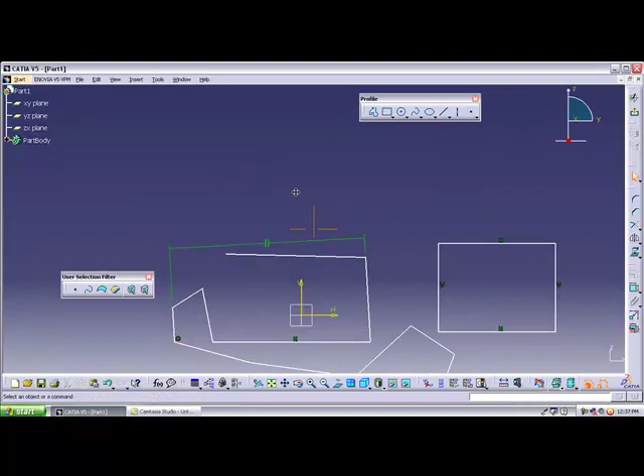Okay, so if you hold the middle button and move the screen, it is called a pan. Means by holding the middle button of the mouse and moving the cursor, the screen moves; it is called a pan.

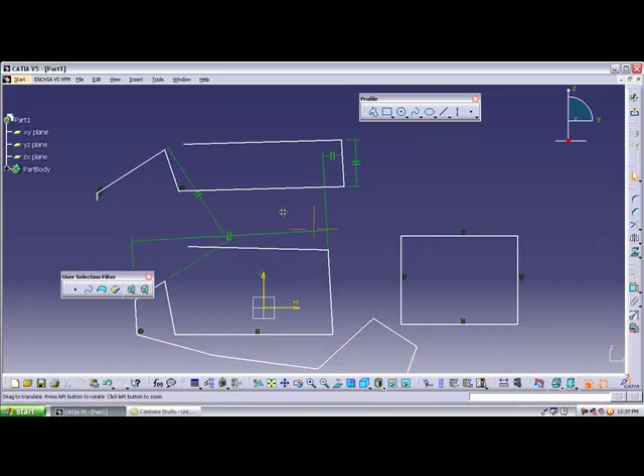Okay, after that, just like in AutoCAD, there is an option of ortho. By the ortho operation we can draw a line straight in the direction of 0, 90, 180, 270 degrees. Here also we have that option. Let's see, here the line is in a white color. If you go in the 0 direction, it's converted into blue. From the top, it is 90 degrees, and it also turns blue. Going to the left side, blue means it's 180 degrees. Going to the bottom, it is 270 degrees and the line is straight.

So how can we recognize whether the line is straight or not? By seeing the color. If the line is converted into blue, it indicates that it is a straight line. Right now the line is straight in the 0 direction, in the 90 direction, in the 180 direction, as well as 270 degrees. Like this we can draw a straight line by the color. To draw a straight line, we should show the direction, and if the color turns blue, the line is straight.

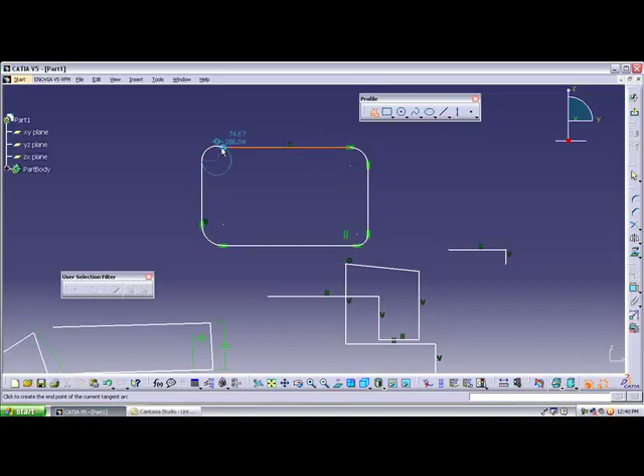Okay, so I'm showing one more point here, and it's getting a straight line. After that I want a curve, so I am dragging this one like this. Okay, so from the profile toolbar we can draw a straight line as well as an arc. This is the profile tool.

In CATIA there is no erase option. So to delete all the things, select all the items and use the delete option. Then we can delete all the things. So with the profile toolbar we can draw a straight line, and it's a continuous line. To end the line we should double click.

Suppose when we are drawing a profile, if you want a curve, then by holding the same selection button you should drag the mouse, then you will get a smooth curve. This is the profile. Okay? So the next one is the rectangle.

A rectangle is nothing but a shape which has 4 sides. Except the profile tool, the rest of the tools we also call predefined profiles. Profile means it can be any shape; with the profile toolbar we can make any type of shape. What are the shapes we can make? Rectangle, hexagon, polygon, septagon, anything. Those shapes are already predefined, so we call them predefined profiles.

In the predefined profiles, the first tool is the rectangle. By selecting the rectangle we show 2 points, and by showing the 2 points we get a rectangle. Okay? Suppose I want to draw multiple rectangles, then you should double click on the rectangle. If you double click on any tool, then we can use the tool multiple times.

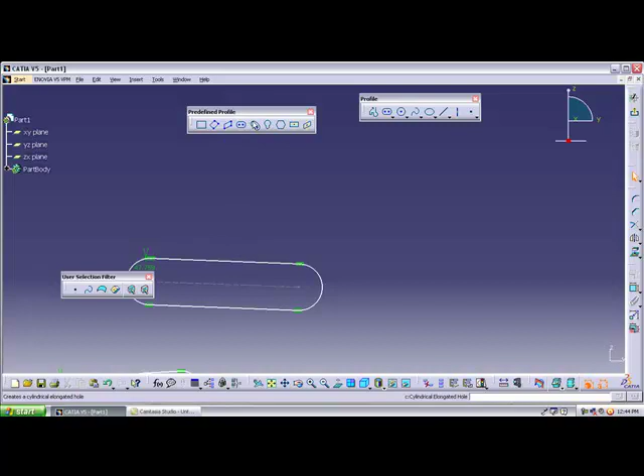And the next one is a circular elongated hole, cylindrical elongated hole. Right now the elongated hole is straight here, but here we will get it circularly. So first of all, you should select the center point of the circle and you will get a circular shape. In this part, how much of the circle do you require? Suppose I require up to here only. After that, if you complete the axis, then you will get it as elongated.

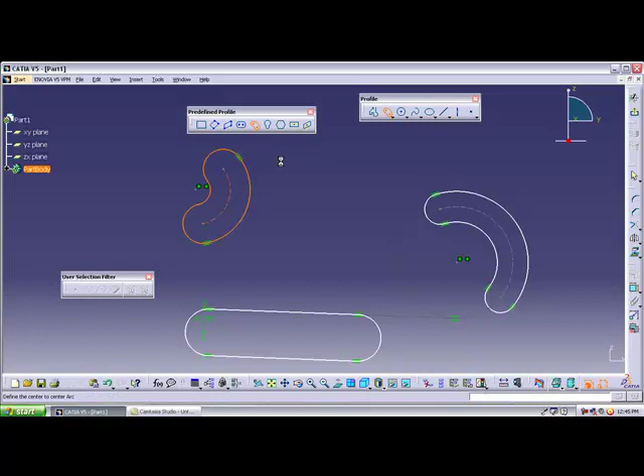So if you want to use an option multiple times, you should double click on that option. So we can use it multiple times. Okay, center point, start, end, and the boundary of the cylindrical elongated hole. Suppose I need one more time. Why? Because I used multiple options. So center point, start point, end point, and the boundary of the diagram. Okay, like this we can make the cylindrical elongated hole.

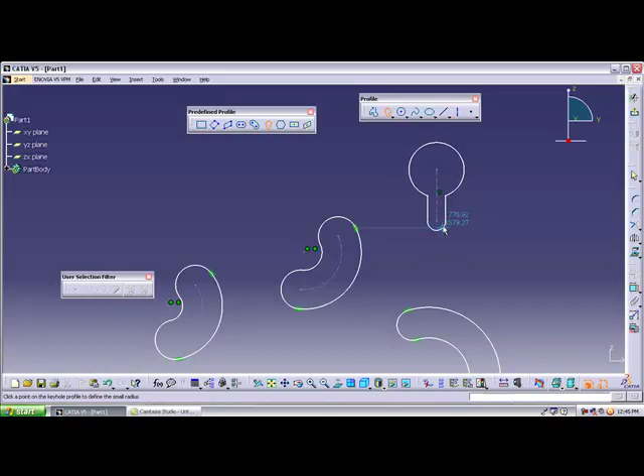Next one is the keyhole. Keyhole is nothing but you are showing the axis. In the elongated hole, the total object along the straight axis is uniformly the same. But here you will get a different type. So this is the shape, and what is the top shape? Okay. So what is the keyhole? First of all, the axis. After that, you give the shape of the downside and the shape of the upside. This is called an elongated keyhole.

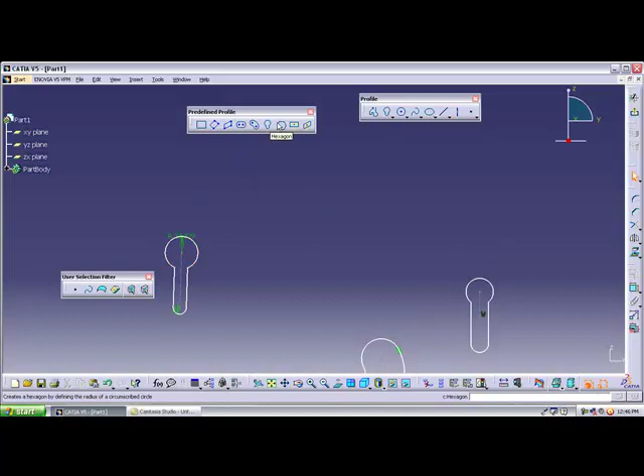And next one is the hexagon. What is the hexagon? It is an object closed by 6 sides. Okay, this is called a hexagon. So by selecting this hexagon, show the center point of the hexagon and drag out, then you will get a hexagon.

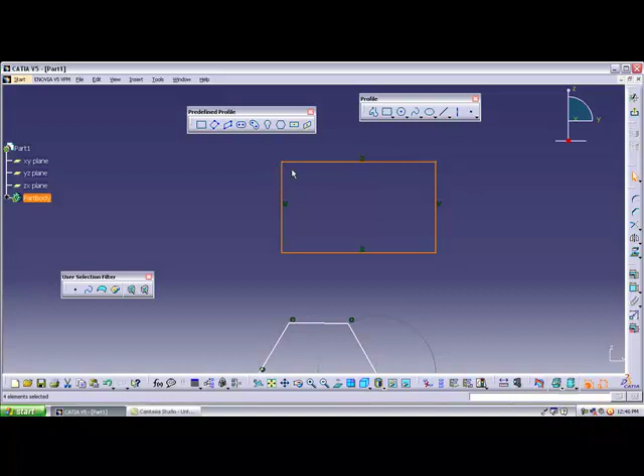And next one is the centered rectangle. Let me see what is the difference between the first rectangle and the centered rectangle. In the first rectangle, we are showing the corner points of the rectangle, first corner and second corner. The centered rectangle means we are drawing the rectangle from the center of the rectangle. Right now I am showing the center of the rectangle. See, the rectangle starts from the center point, so it is called a centered rectangle. We show the center point, then we get the rectangle from the center. So it is called a centered rectangle.

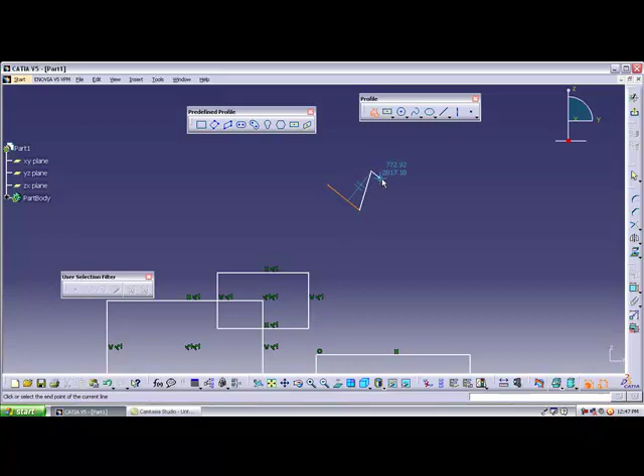And the next tool is called a centered parallelogram. Just like the centered rectangle here. To draw a centered parallelogram, we compulsorily need references. Why? Because in a rectangle the two sides are compulsorily at 90 degrees, but in a parallelogram the sides are different. So select the centered parallelogram and select any two sides. Then what will you get? You will get a centered parallelogram.

How is it possible? These two lines are parallel to this line, as well as these two lines are parallel to this line. And what is the intersection point? This is the intersection point of these two lines. So from the center intersection point, the parallelogram starts. How to use the centered parallelogram? Select centered parallelogram and select the two lines, from the center point of the two lines. Then you will get a centered parallelogram.

Okay, now on the screen I have drawn many objects, but right now I am only viewing here. I want to see all objects on the screen. At the bottom, you will have the option called fit all in.

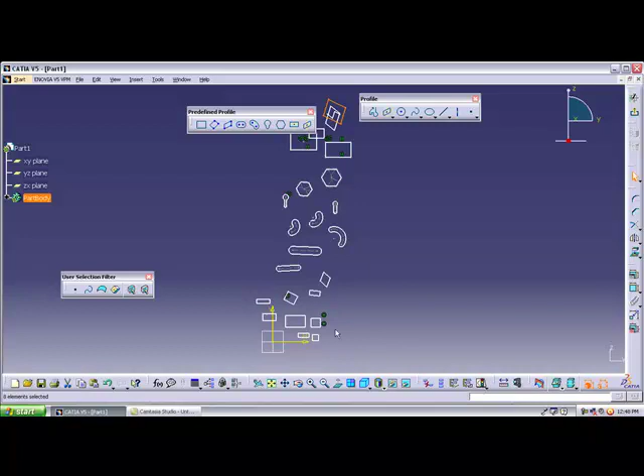By holding the fit all in option, we are fitting all the objects into the screen window. This is called fit all in - placing all objects into the screen window. Right now I want to delete all objects. What I should do is drag the mouse, select all the things, and use the delete option.

Right now the screen is very big, so I want to place the coordinate at the center. Then use fit all in - what happens? The coordinate system comes into the center. So using fit all in, we can fit all objects into the screen, and if there are no objects, the coordinate system gets placed at the center of the object. This is a predefined profile.

The next one is circles. We have different types of circles. This is the first type of circle. What is the meaning of circle? What are the components to draw a circle? That is the center point and the radius. By showing the center point, and next the radius, what do we get? We get the circle - just by showing the center point and the radius.

To get multiple circles, what should you do? We should make a double click on the tool. By double clicking on any tool, we can use that option multiple times. This is called circle.

Next is the 3-point circle. The first circle is formed by showing the center point and the end point. Here the circle is formed, but this circle is formed by joining 3 points - first point, second point, and third point. Let me select the 3-point circle and show the 3 points - by showing 3 points, the circle is formed.

Suppose I show the 3 points - this as the first point, second point, and third point. The circle is formed between these 3 points. Like this we can make a 3-point circle. So a 3-point circle is nothing but showing 3 points, and the circle is formed through those 3 points.

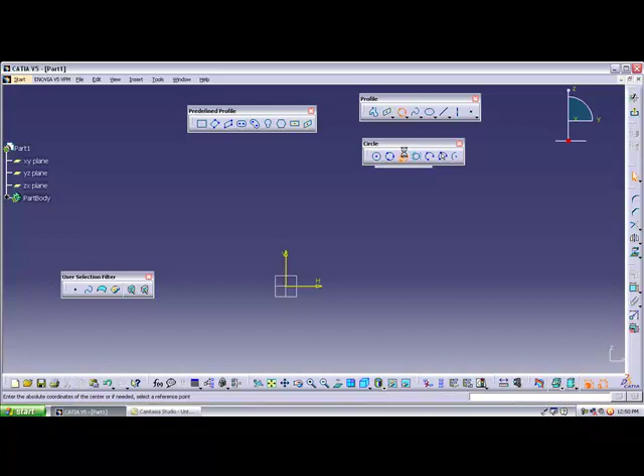Next is the option of coordinate circle. These circles we can draw anywhere, but this circle is drawn using coordinates. Let us see - select a circle. It asks for the x and y axis, but in CATIA it is in the form of horizontal axis and vertical axis.

It's asking what is the distance from horizontal and vertical for the circle's center point. Suppose from horizontal the distance should be 50, and vertical the value should be 75 - that is the center point of the circle, shown at a certain distance: horizontally 50 and vertically 75. And what is the radius of the circle? Suppose the radius is 50, let us assume. Then you will get a circle.

Suppose if I require a circle in the second quadrant, what parameters should we give? We should give horizontal as minus 50, and vertical can be anything, then the circle can be formed in the second quadrant.

Suppose if I require the circle in the third quadrant, we should give the parameters as negative values: negative 25 and negative 25, with the circle radius as 20. See, right now the circle is formed in the third quadrant.

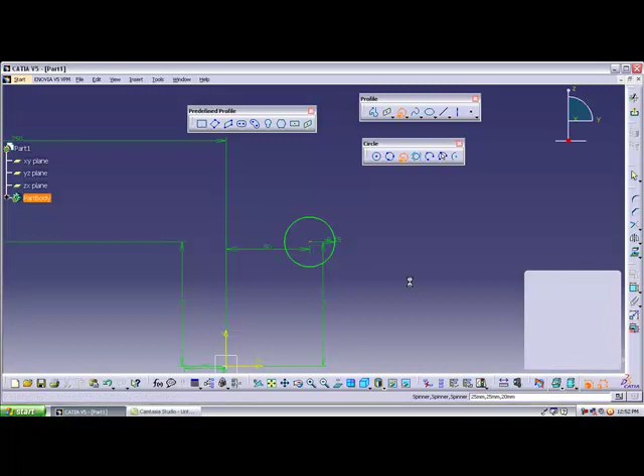Suppose I want to change the origin point to this point. So if you want to change the origin point, first you should choose the origin point. After that, make the coordinate system and give the parameters, then the dimensions are taken from what was shown in the previous point.

So from this point it is taken as the origin. If you want to change the origin, first select the origin point, then start the coordinate system. Then it will take this point as the origin, and from that origin only the circle will be formed. This is called a coordinate circle.

Now I want to delete. What you should do is select all the objects and use the delete option.

The next one is called the tangent tritangent circle, meaning a circle formed by touching three lines, or also circles. What is meant by touching, what is meant by tangent? Tangent means it should touch some components - the components may be a circle, a rectangle, or anything.

So tritangent circle means: suppose I show these 3 lines, then the circle is formed by touching all the lines. Similarly, I'm showing 3 circles - first circle, second circle, and third circle - and by touching these 3 circles, a circle is formed. It is called tritangent because there should be 3 tangents for the circle to form.

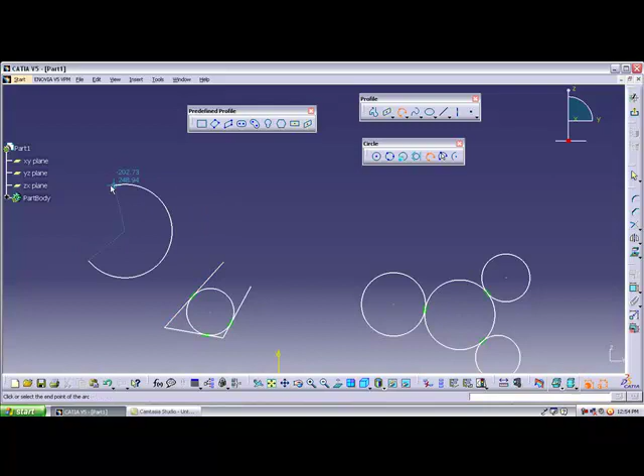The next option is the arc, called the 3-point arc. What is the meaning of arc? Arc is nothing but a part of a circle. The first one is the 3-point arc, meaning if you show 3 points, you will get an arc: first point, second point, and third point. We can also call these the starting point of the arc, the midpoint of the arc, and the end point of the arc. So what are the 3 points? Start, mid, end.

The next one is also a 3-point arc, but here it's a bit different. In the previous one, it was start, middle, end, but here we show start, end, and then the midpoint. So the difference between the first arc and second arc is clear: starting point, end point, after that we show the midpoint.

The next one is called the arc. What's the exact difference? As I said, arc is nothing but a part of the circle. So here, first when we choose this option, we show the center point of the arc, and after that you get a complete circle. Since arc is a part of a circle, we should then choose how much part of the circle we require. So this is the arc.

One more time: select this arc option and show the center point of the arc, so we will get a circle. Then choose how much part of this circle we require - that is the arc. It is formed from the circle. So this is the circle toolbar.

The next one is the spline. What is the meaning of spline? Now, what is the meaning of a line? A line is nothing but a straight line between 2 points - if I show the points, a straight line is formed between them. Similarly with spline - spline is nothing but a smooth curve formed between the 2 points.

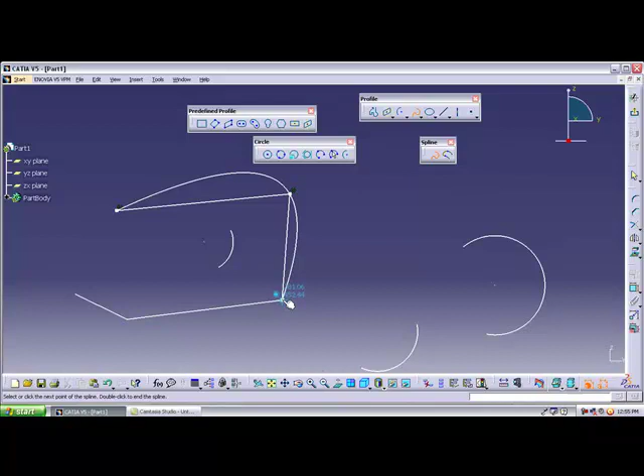See, right now I'm showing the same points which I showed for the line. So what are you getting here? You will get a smooth curve. For the profile also, I showed the same points.

For the spline also I am showing the same points. The difference is that if it is profile, it is forming a straight line, but in the spline it's forming a smooth curve. It's not important that we show the same points used in the profile. If you roughly show the points, you can form a smooth curve. So by showing the points, you are getting a smooth curve.

To end the spline, what we should do? We should make a double click. Then the spline will be ended.

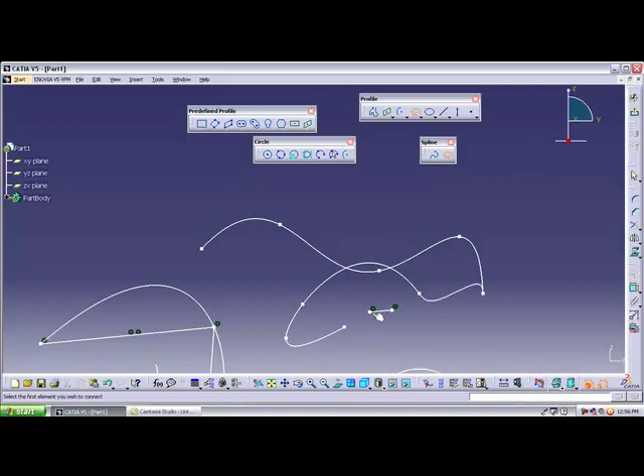So this is the spline, and in the spline toolbar you have one more option called connect. The connect tool is used to connect two splines. Suppose there are two splines, we can connect them using the connect option. By selecting the connect tool and selecting the two splines, we can connect them. So suppose I want to connect this spline and this spline. See, a spline is formed between the two splines. What we call this is the connect option.

The next option is the ellipse, or conic as we also call it. Now, what is the difference between circle and ellipse? In circle, we have only one radius, but in ellipse we have two radiuses or two diameters, called the major axis and the minor axis. If you give the radiuses, you get the major radius and the minor radius. That is the difference between circle and ellipse. In circle we have only one radius, in ellipse we have two dimensions, two diameters.

So by showing the center point of the ellipse, you will get the oval shape, which we call an ellipse. Let us see if you get the sides. Right now we are showing one as the major point and the other section as the minor axis. So this is the major, let us consider, and this is the minor. Whichever is the big portion is called the major axis, and whichever is small is called the minor axis.

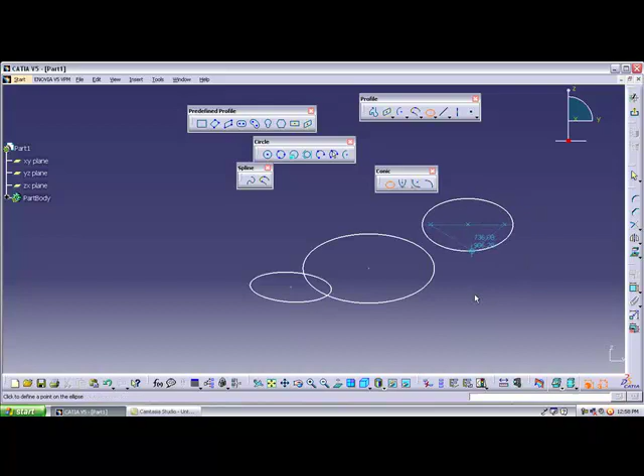So how we can draw the ellipse: show the center point and drag. It may be major or minor. Suppose I consider it minor, then it should be small, and the next portion we are drawing should be big, then it can be called the major axis.

In the conic, the next option is the parabola. How do we draw the parabola, and what is the meaning? Just as an arc is a part of a circle, a parabola is a part of an ellipse. So parabola and hyperbola along with conic are the three options in the conic toolbar only.

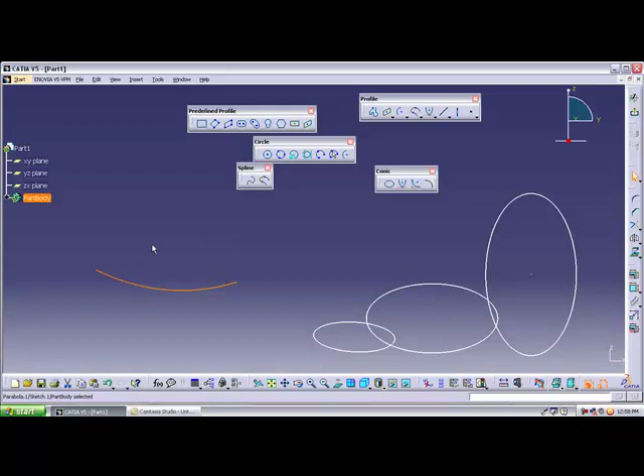So how can we form a parabola? Let me see. Select the parabola, we are showing the focus point, then the apex, then the start and end. Let me see, just like the name suggests, we can call it a part of an ellipse also. So to form a parabola: focus point, apex, start, end. Right now, see this point I've shown, from here to here is less distance, and from the right side it's a bigger distance, which means it's the part of an arc. So this is the parabola.

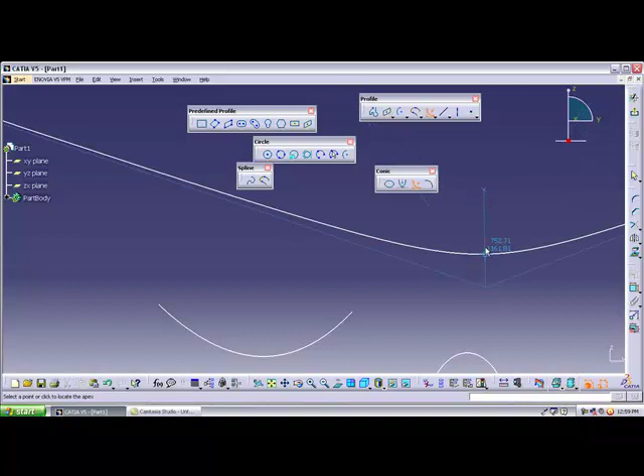The next one is the hyperbola. How do we form the hyperbola? Let us see. Here also the same terms used in the parabola apply, but the difference is somewhat different. Here also we show the same focus point, but here you get one more point called the center point. After the center point we should show the apex, after the apex we use the start point and end point.

One more time, the difference is that here you have one more option called center point. Select the hyperbola, select the focus point, after that show the apex point, after that start point, end point. One more time: select the hyperbola, select the focus point, after that show the center point of that hyperbola, after that apex, after that start and end.

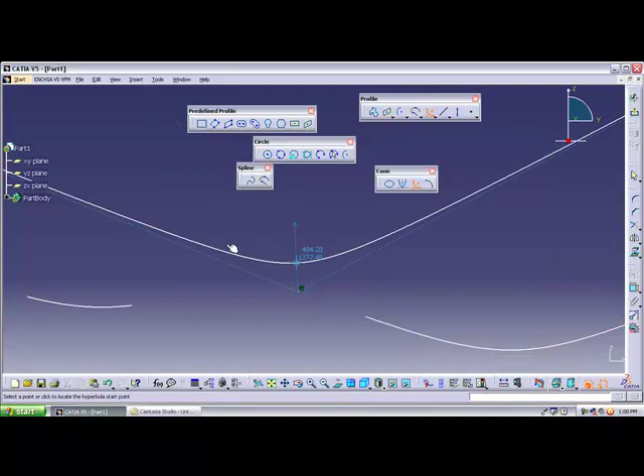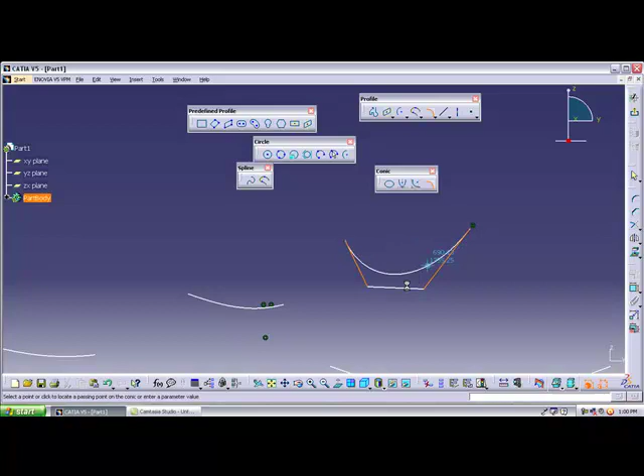Okay, this is the hyperbola, and the next option is called a conic. What does conic mean? The conic is just like forming a tritangent circle; like that, we can also form a tritangent arc. Select the conic option and select the two opposite lines, after that select the third line, then you can form the conic feature. One more time.

Okay, this is called a conic, meaning there should be two lines, after that we should show the third line, then you can form the conic feature. Okay, right now we completed the conic, and the next option we are dealing with is called lines. This is the lines toolbar.

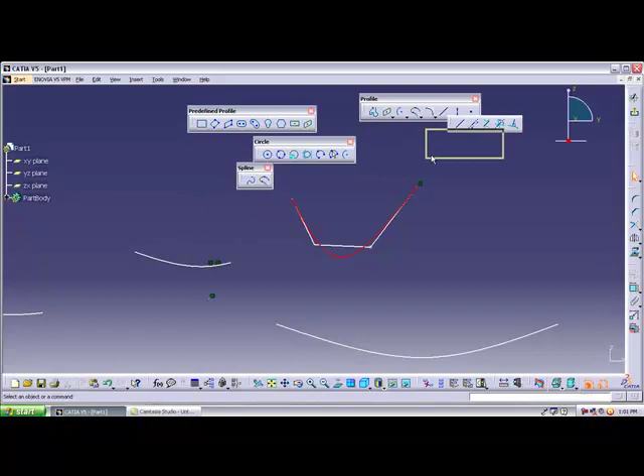Actually, in the profile we can draw a line, but there the line is continuous in the profile. Here we have the line option. This indicates it's just a small line between the 2 points, it's not a continuous line. By selecting the line we show the 2 points, and the line will be formed between the 2 points.

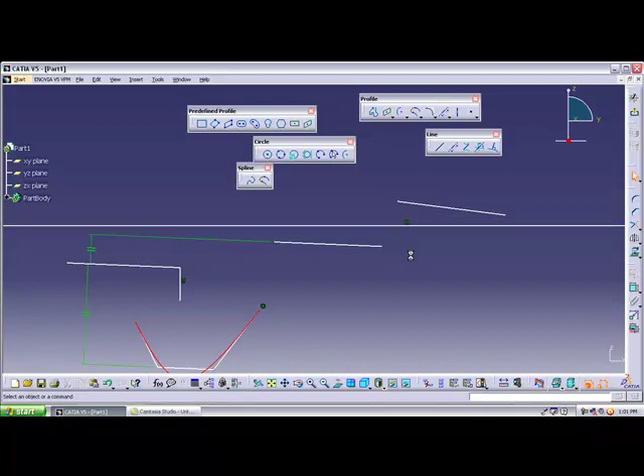Okay, and the next one is the infinity line. Infinity line means the line has no end. Let me see, suppose I use the fit all in option, then what will happen? See, all of these are fitted, but these two lines are in an infinity condition, so it is called the infinity line.

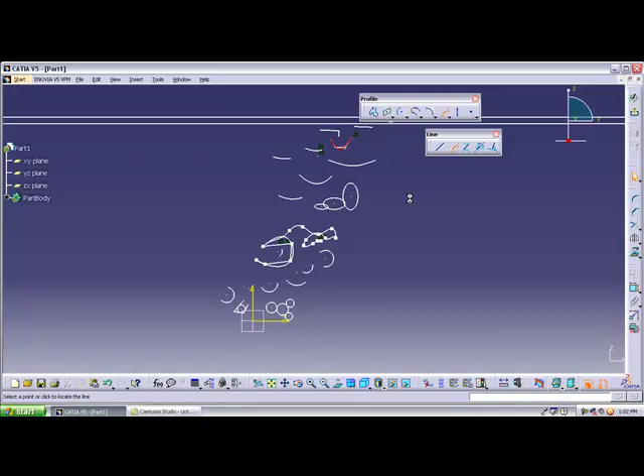So this is the infinity line, just select the infinity line. If I show 2 points, then you will get the infinity line. See, right now I am selecting the infinity line and showing the 2 points; by joining the 2 points we get the infinity line. Infinity line means it doesn't have an end, so it is called an infinity line.

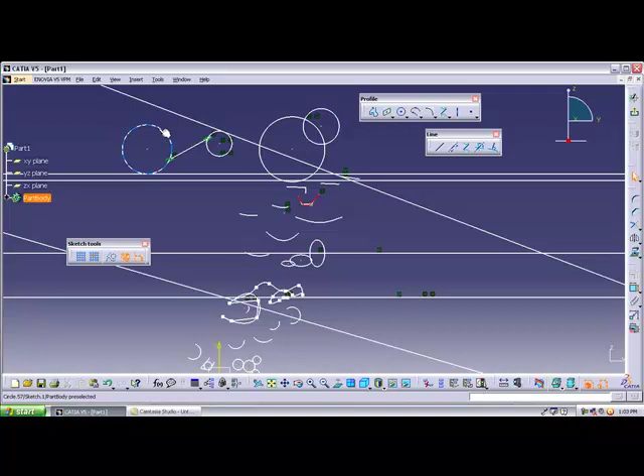Okay, and the next one is called the bitangent line. To draw this line, we compulsorily need two circles, then only we can form a bitangent line. So right now there are two circles. Only by touching these two circles is the bitangent line formed. Select the bitangent line and select the two circles. Between the two circles the line will be formed. It is called the bitangent line. This is bitangent. And the next option is the bisecting line.

What is the meaning of bisecting line? Suppose there are two lines here, like this. Right now I want to form a line between these two lines, exactly in the middle of these two lines. So select the bisecting line and select the two lines, then the line will be formed between these two lines. You can call it a bisecting line.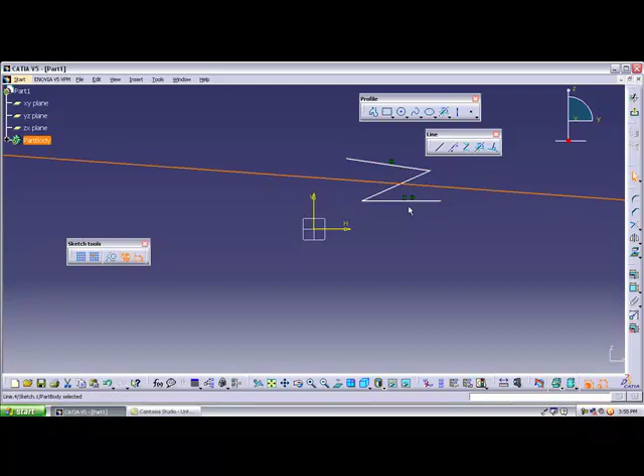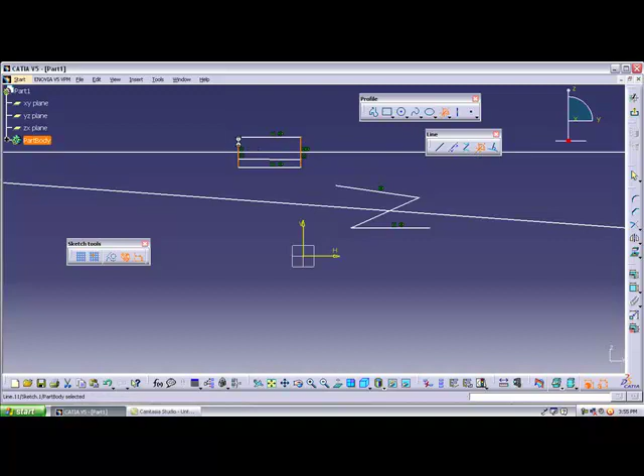Suppose I take a rectangle; if I select two sides of the object, what will happen? See, I am selecting these two lines, then we form the bisecting line, bisecting these two lines. As well, if I select the vertical lines, it creates the bisecting line vertically. So that is also a bisecting line. Select these two lines, then you form the line. It is called a bisecting line, and the bisecting line which is created is also an infinity line. So this is the bisecting line.

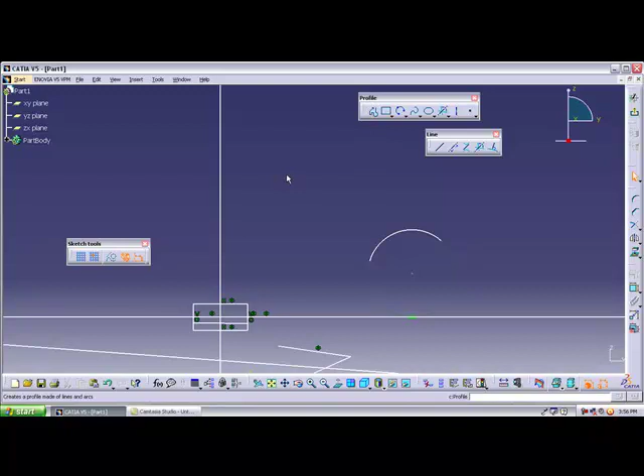And the next one is the line normal to the curve. Line normal to the curve means, suppose there is an arc, let us assume there is an arc. And I am creating one more line here. Right now I want a line between this arc and this line, then we can create it. The name indicates the line normal to the curve.

First of all you should select the point, after that select the curve, then the line which is formed to the curve is perpendicular. It is called the line perpendicular to the curve. Suppose I select this point, and right now I am selecting this arc. See, right now the line is created normal to the curve. So this is the line normal to the curve option.

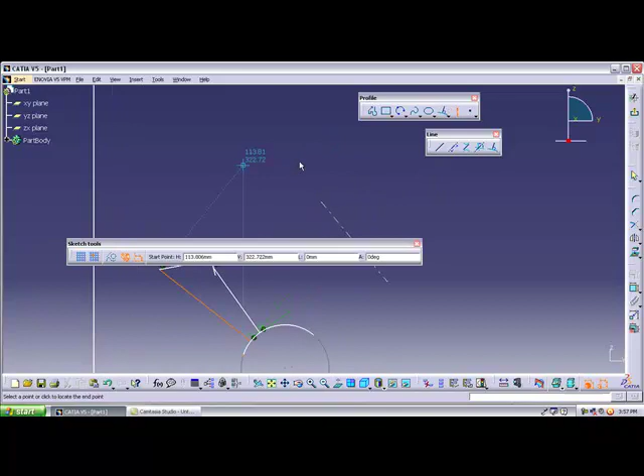And the next option is the axis. Axis is nothing but creating a reference object. It makes the axis, and the axis is a very important thing when we are using the shaft feature in the part design. It will be mostly useful. Right now we have the horizontal axis and vertical axis. Like that, we can create one more reference axis by using this option. So this is called the axis.

And the next option is the points. First option is point, means just click where you want to place the point and place the point. If you want multiple points, then you should double click on that option. You can use the option multiple times. Okay, this is the point option.

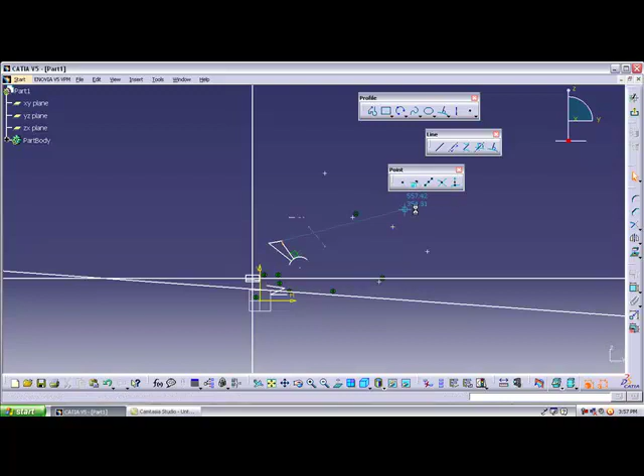And next one is the point by the coordinates. Right now I want to make a point by the coordinates. Suppose if I want to change the coordinate system, first of all I select the coordinate system origin, and select the coordinate points. Right now the parameters we are giving are the horizontal distance and vertical distance. Suppose 25 and 25. See, right now the point is created from that point at 25 and 25 distance.

Suppose if I require it on the left side, what should we do? We should give the parameter in the second quadrant values, that is the negative x and the positive y. If I use negative x and positive y, it is placed in the second quadrant. Okay, point by the coordinates.

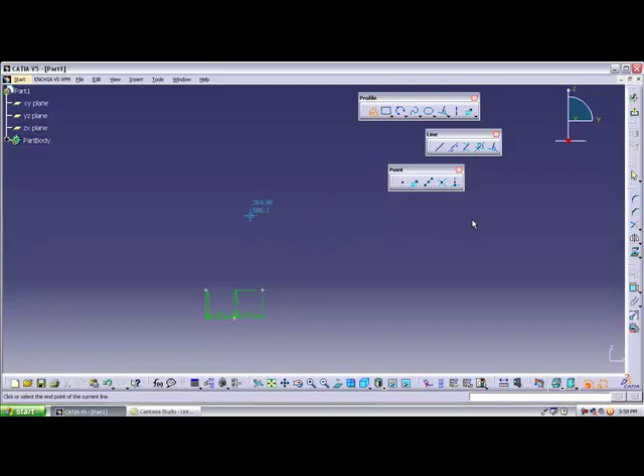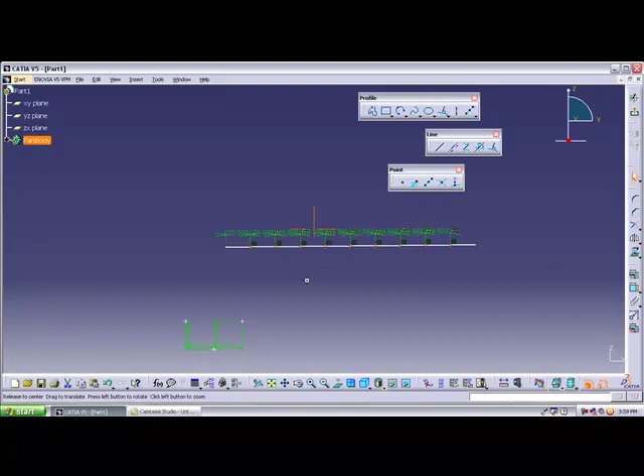And next one is called equidistant points. Suppose there is a line. Right now I want to divide a line into 10 parts, but I don't know the length of it. Then select the line, after that select the points. Here it asks for new points, how many points I want. If I want to make the line into 10 parts, I use 9 points, then the line is divided into 10 parts. See, the length of each part is 22.103. Like this, the line will be divided into 10 parts: 9 points, 10 parts.

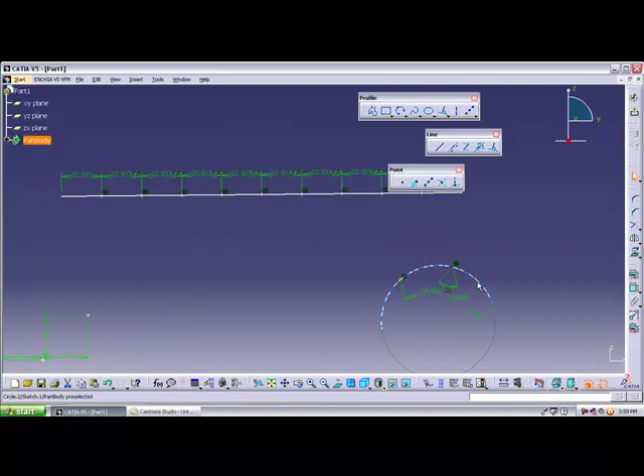Like this we can divide any line, and if you require, you can divide an arc also into an equal number of parts. Select an arc, after that select the equidistant points and how many points you want to place on that arc. If I want to divide the arc into three parts, I give 2 points, then the arc will be divided into 3 parts, and the 2 points will be placed. Like this we can make equidistant points.

And next one is the intersecting point. Intersecting point means where the intersection happens. Suppose any two lines are intersected, one line passes over another line. Right now I want a point where the two lines are intersected. Select intersecting point and select the two lines, then the point is created between these two lines. It is called the intersecting point. One more time, select the intersecting point and select the two lines, then the point is created where the two lines are intersected.

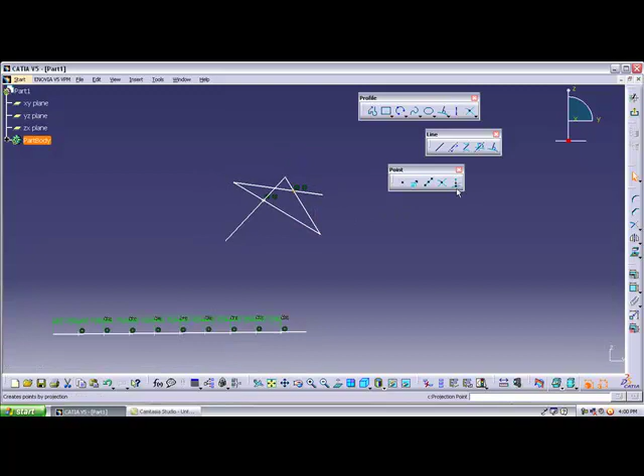Okay, the next option: previously we saw line normal to curve. Here, projection point is just like the line normal to curve option. The difference is that previously a line was created, but here a point is created. I am selecting the point, after that I am selecting the curve. One more time, select the point, after that I am selecting the arc.

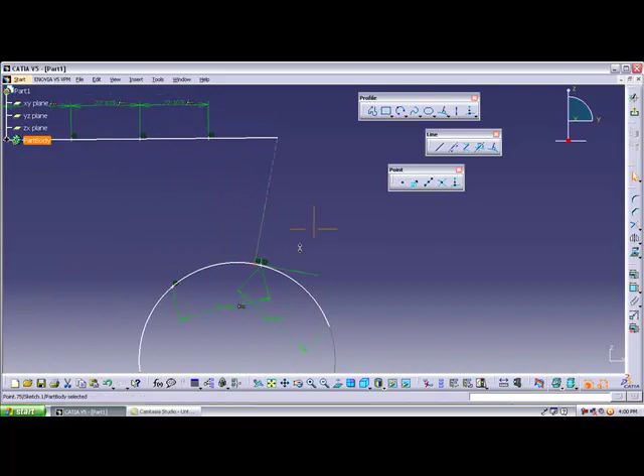See, right now the point is created. How is it created? It's perpendicular to the curve. One more time, I select this point, after that I select the curve, then the point is created normal to the curve by referencing this point.

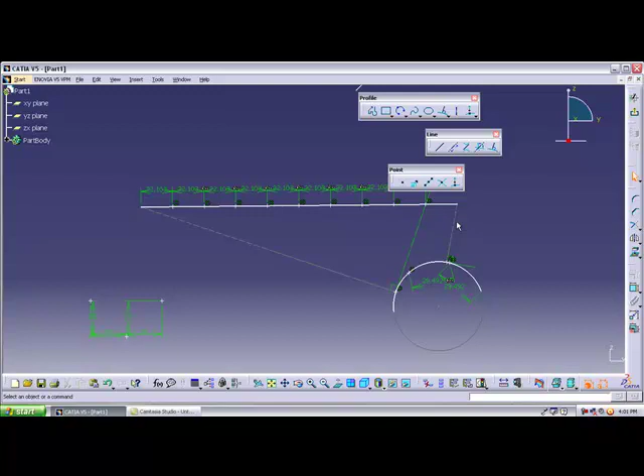Okay, see one more time: first of all, select where to start, from here to here, and this is the arc. See, right now the point is created; this is normal. Previously the line was created, but right now the point is created. So this is the profile toolbar. Profile toolbar means we are creating the different types of profiles. Using all these tools we can create profiles.

By learning the profile toolbar, what is the use of the profile toolbar? Let me see. What is meant by profile? Profile is nothing but the outline boundary of the shape. We can call it a line diagram of the object also. Suppose right now let me take a monitor. What is the monitor shape? From outside it looks like a rectangle.

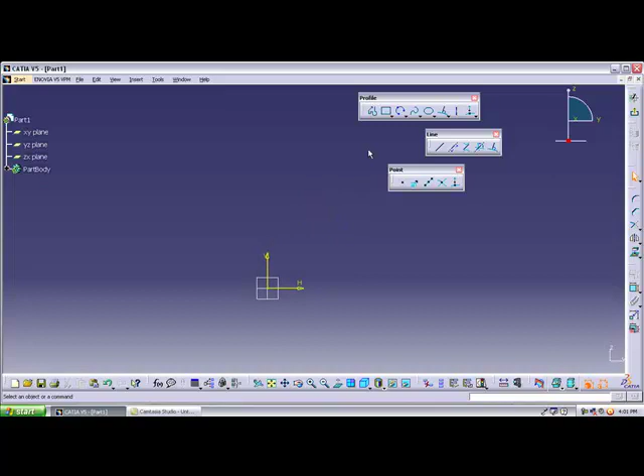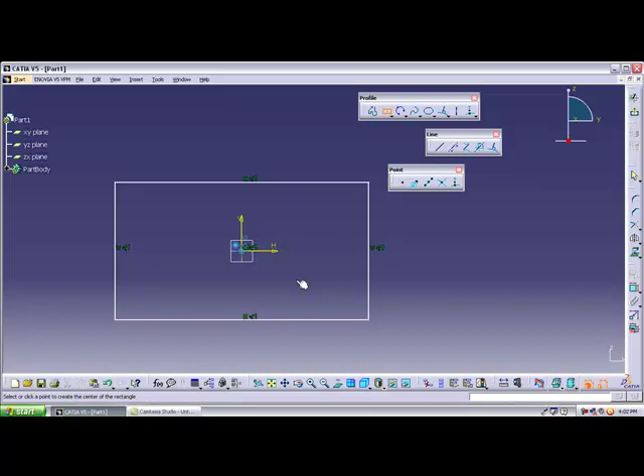Suppose I want exactly a rectangle, so I am taking center rectangle, starting from the center. Okay, with the centered rectangle I get the selected rectangle. By drawing this we can't say that it's exactly a monitor shape. So inside we have the screen shape, so we are making the inner screen shape. This is the screen shape.

This is just a rough sketch. What is the first step of designing? The first step is the rough sketch. After that, here we should place the buttons. In my system, here we have the buttons. So right now I am creating just what I am seeing in my monitor; I am making a rough sketch here.

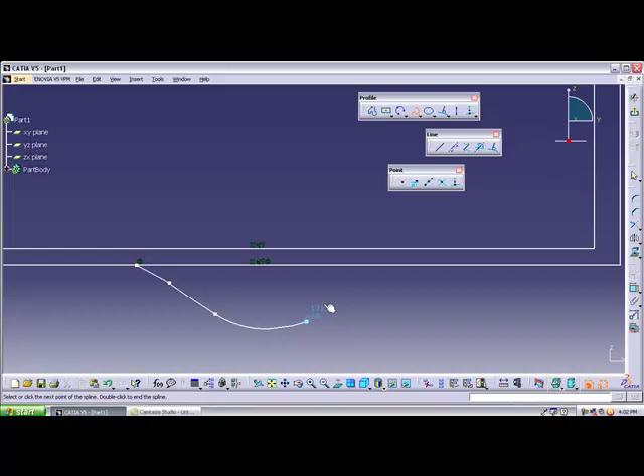So in this part there are buttons, options to start and to stop. Here we have the small options. The middle button is used to control the screen resolution, and there is one more middle button used to switch it on and off, which is in the form of a circular shape. So I'm drawing a circular shape. To get a light, it has a small circle in between, just like this one.

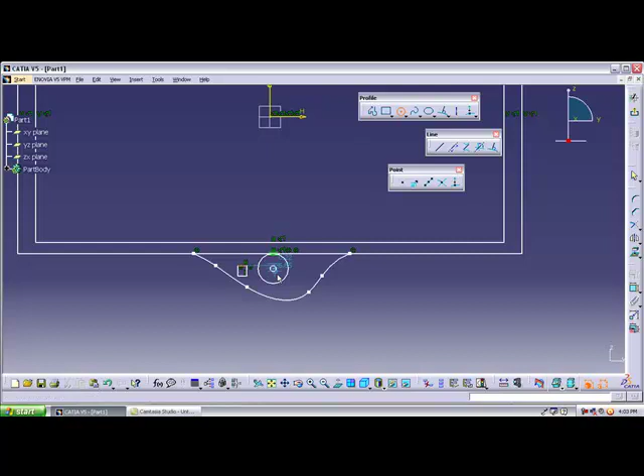The first step in designing is drawing the rough sketch of the geometry. After that, we modify the geometry according to our correct dimensions and the properties it has; we can assign the properties. By drawing this, you can understand it's not the exact shape of the monitor, but it's getting close to the monitor shape.

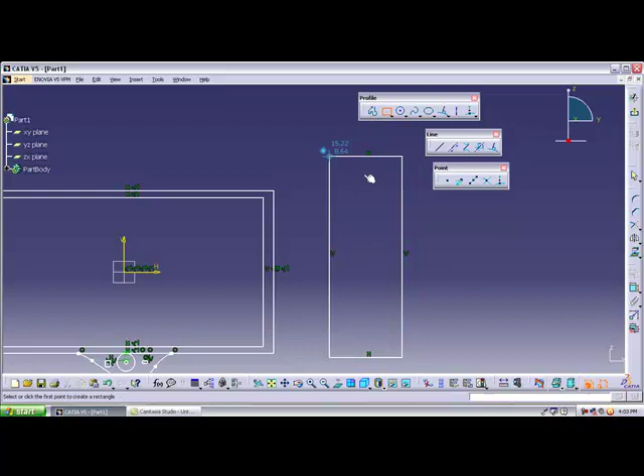As well as the CPU. The front view of my CPU is like this: the height is greater than the width, and to insert a CD-ROM, DVD writer and some more things, he gave some small boxes here. Okay, one more time, select the rectangle and starting from this point, he gave small boxes like this one. He provided some more boxes, in case you want to extend two or three DVD-ROMs.

Like this, we are drawing the rough sketch of the geometry. After drawing the rough sketch of the geometry, in the second step, we add constraints to the rough sketch, meaning we give the dimensions.

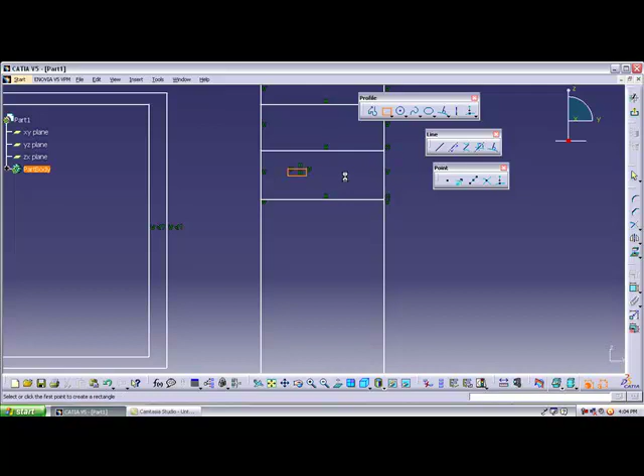Okay, next, in the fourth box, he gave USB ports to insert USB pins. So right now I am drawing the small USB ports. These are the USB ports, and between the two USB ports he gave two jack ports to insert the sound pins.

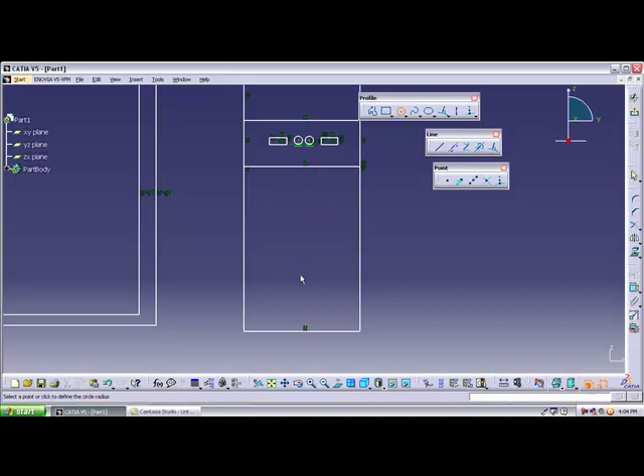Okay, going down, he gave a very big button which is used to start the CPU. In this small design, he gave a small button. And he made a design here so that it looks somewhat different. He gave an outline boundary structure with a somewhat different, rounded shape.

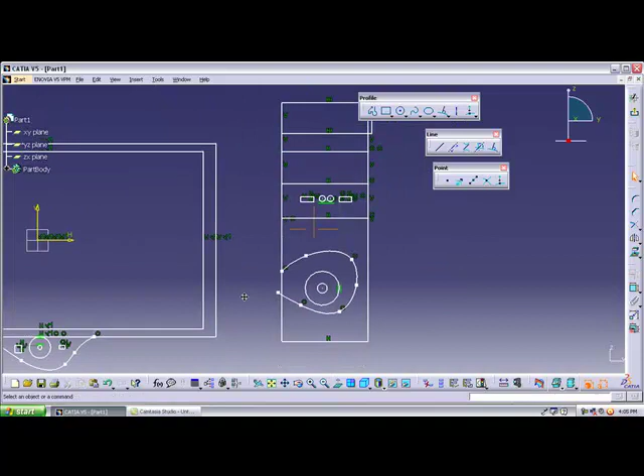Okay, so these are the different types of shapes we can create in the profile. In the sketcher, when we are designing a new component, the first step is drawing the rough sketch of the geometry. By using the profile toolbar we can draw any type of shape. So the first step is drawing the rough sketch of the geometry.

After drawing the rough sketch, we can apply constraints. In the next class we will learn constraints, meaning we make the model according to our dimensions. Right now I have drawn the monitor shape, but I haven't given its length; it may be 1 meter or 20 meters. I don't want it approximate, I want it correct, so I should constrain it to perfect dimensions. In our next class we will learn how to make the diagram into perfect dimensions and constraints.

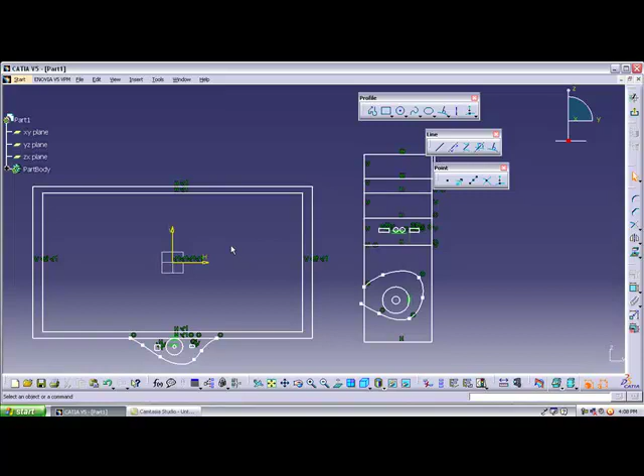So by learning the profile toolbar, we can make a rough sketch of any geometry. Suppose I want the side view of a trolley, let us say a small tipper, a small utility vehicle. What is the side view of that? From the side view it looks like this one; we can also consider it like an auto. Okay, so this is the side view of that object.

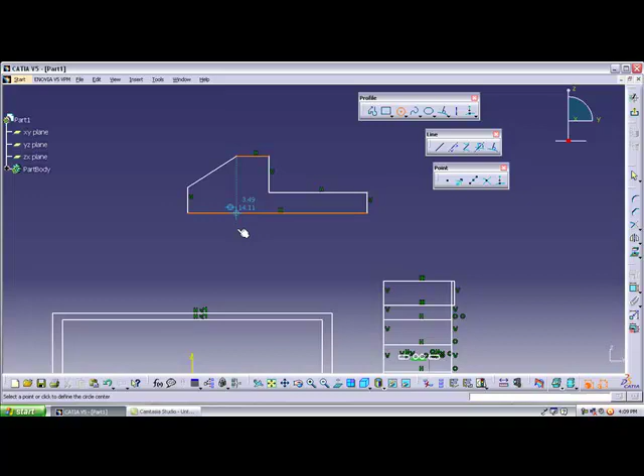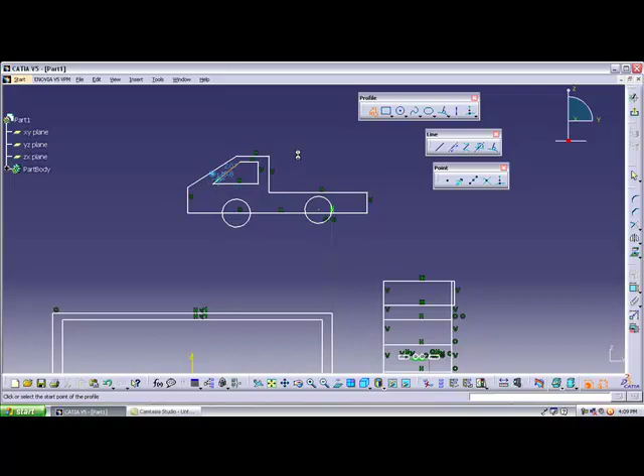It has 2 tires, so these are the 2 tires, and here is one small window to get out and get in. Okay, like this we can make any rough sketch. This is the side view of the trolley. What is the front view of this trolley? Let me consider this is the front view of the trolley. Like this we can make different types of sketches.

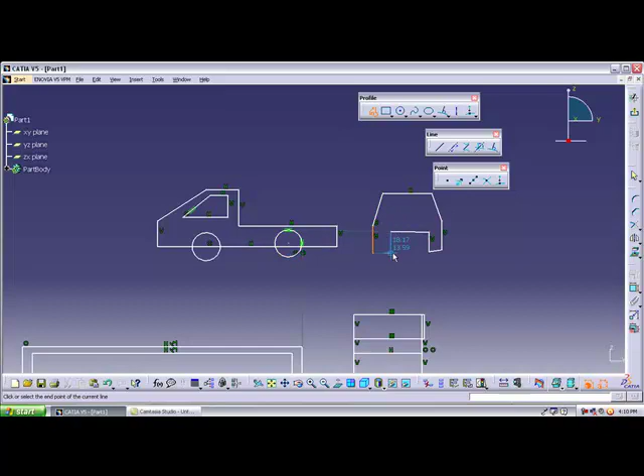This is just a rough sketch. It's not the exact shape of that object, but it is a rough sketch. Tomorrow we will make it the exact shape with exact dimensions. So in my next class we will do constraining.